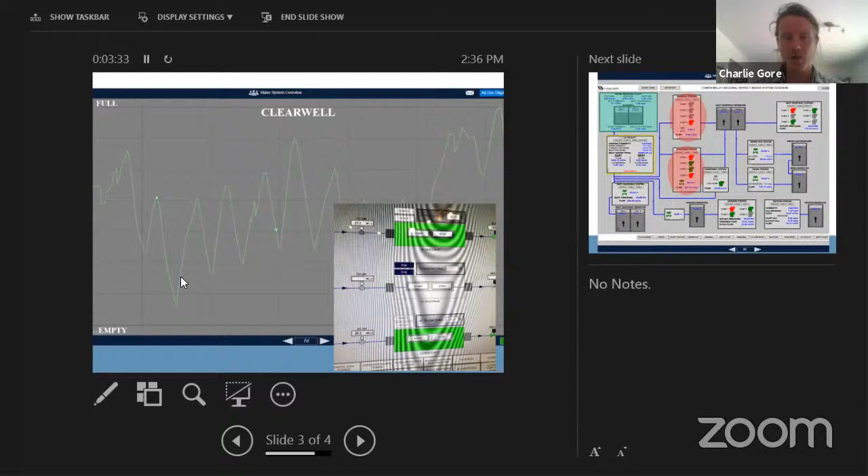So again, that was a very nervous week for us as we watched this new operation system in practice, but our contractor team, as well as our fantastic operators at CVRD, worked through all those bugs and were able to keep the system flowing flawlessly.

This is a little snapshot of our PI system, which gives a graphic representation of our system. You can see in the top left a new part of our facility showing the water treatment plant and the clear well, the large reservoir at the tail end of our treatment plant, feeding our new system and our existing system.

You can see the Dingwall station and Ryan Road station, pump stations in our existing system required during high usage to pump water up to the East Courtenay Reservoir. We showed over the last week that with the treatment plant online, we don't need any of these pumps anymore. This is another advantage of our new system, that we're able to start decommissioning some of the pumps required in the past to feed our residents.

We can start decommissioning those because we've located the reservoir at the water treatment plant at the right elevation, so we can feed the entire system through gravity and use a lot less electricity through the transmission system. That reduces our maintenance costs and has other ancillary advantages, giving our team more time to do maintenance on other parts of the system.

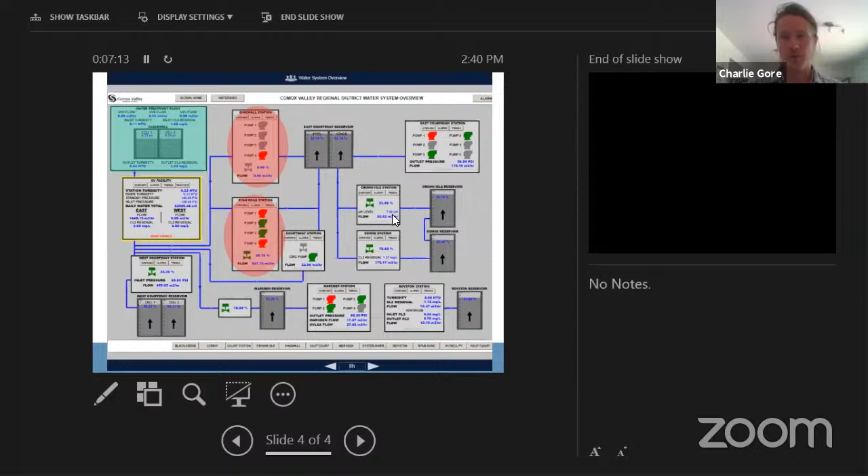That's great, thank you. Yeah, I haven't noticed a significant change in the temperature yet, but I'm looking forward to that. Okay, any other questions? Oh, I forgot to mention that Mayor Wells is alternate for Director Hillian today.

So go ahead, Director Wells, Mayor Wells. Oh, I have to. There you go. Thank you very much, Chair. Yeah, I'm very excited, very serendipitous that I'm here to hear the update today.

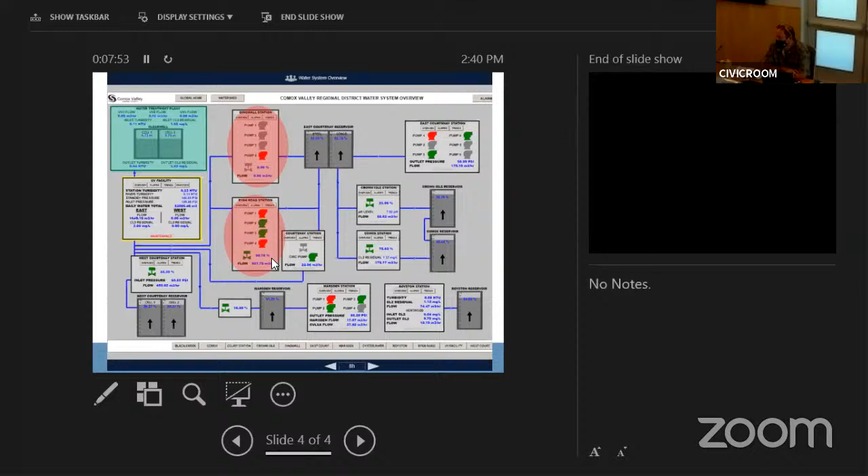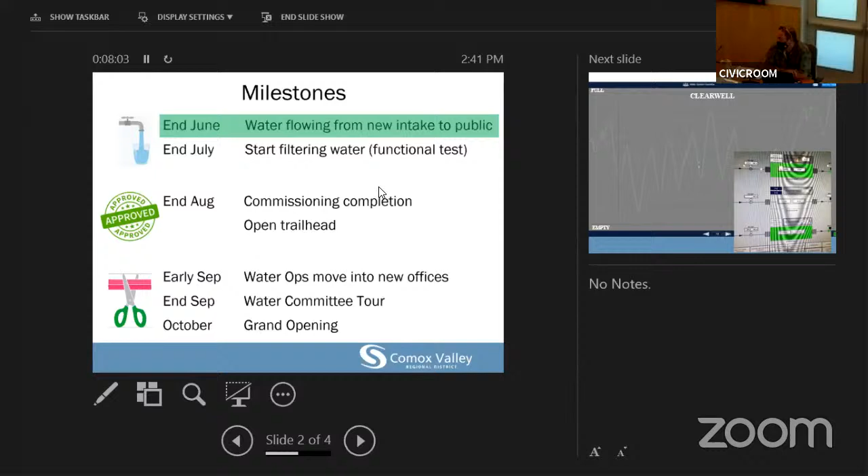Really the only question I have is I saw on the timeline that in September there's going to be a tour for the water committee members. I know of at least one person who's not on the committee anymore but would be interested in possibly attending, that being myself. I don't know if that's possible, but I'm just throwing that out there. Maybe the current chair could put a good word in for me.

Okay, I will do that. But thank you so much. It's great to see where this has come. It's taken a few years, but thanks again.

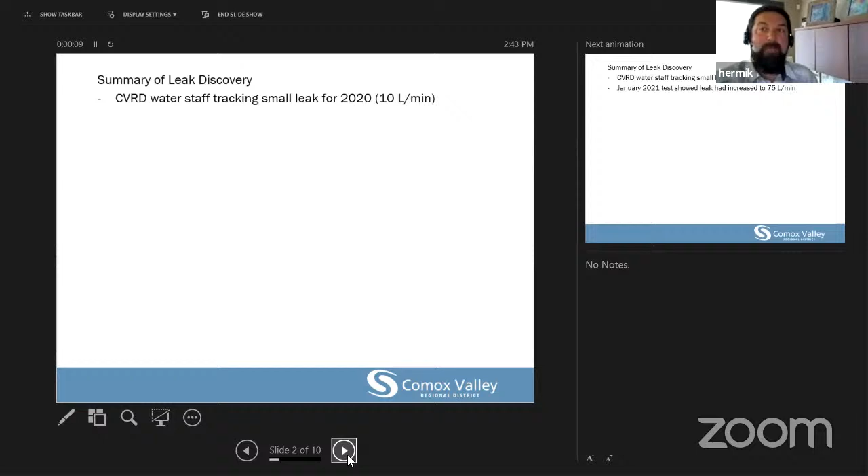So, the summary of the leak discovery. We've been tracking a leak for most of 2020. It was a relatively small leak, about 10 liters a minute. And we had seen a significant increase in our January test, up to about 75 liters a minute.

For context, the leak in 2019 that caused the big repair, going to stage 4, was about 700 liters a minute. So about 10 times the size of this one, but still significant, considering it's treated water going out into the river.

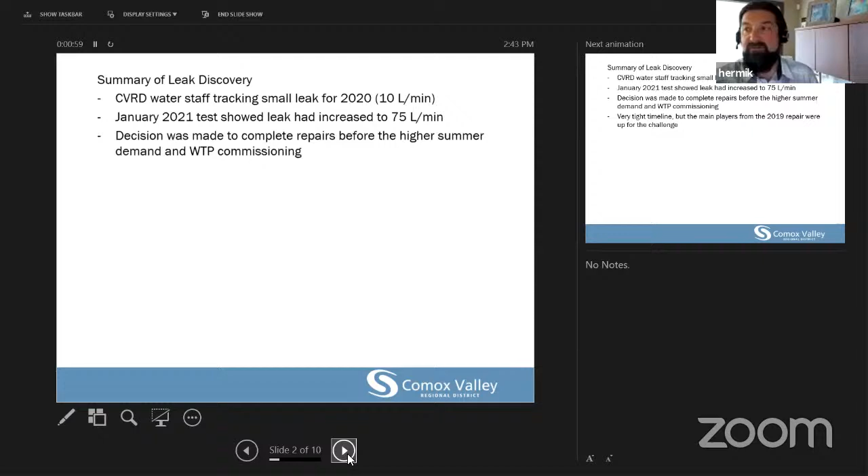So we made a decision to repair before the summer demand, as well as the water treatment plant commissioning. As Charlie mentioned, the pump stations that we're able to deactivate during the commissioning and running of the water treatment plant are due to the fact that we have a slightly higher pressure coming into the system. That enables us to get rid of those pumps, but it was important to try and fix these leaks before this happened.

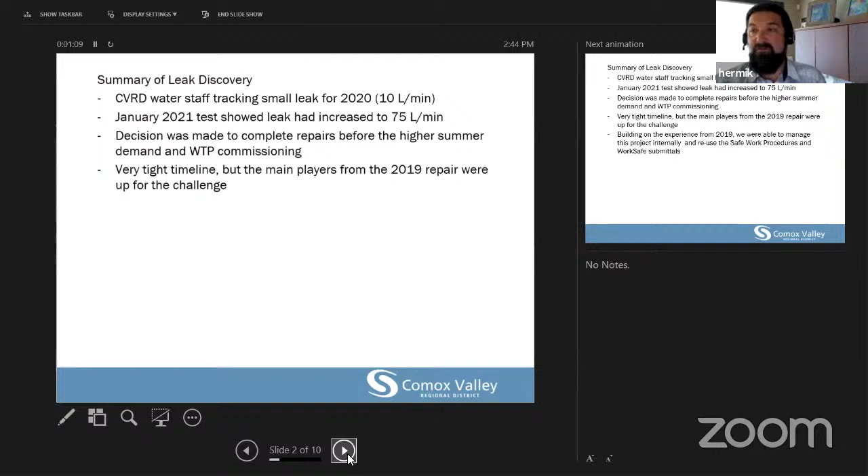It was a very tight timeline, but we were able to get a hold of most of the team members from the 2019 repair, and they were ready to go on our call. So we made the call to repair it. We were able to reuse a bunch of the safe work procedures and work safe submittals that took a lot of time in 2019. There was some new work safe personnel in place, so they came to site and we had a meeting, and they were very satisfied with our procedures and plans. So we were ready to move forward.

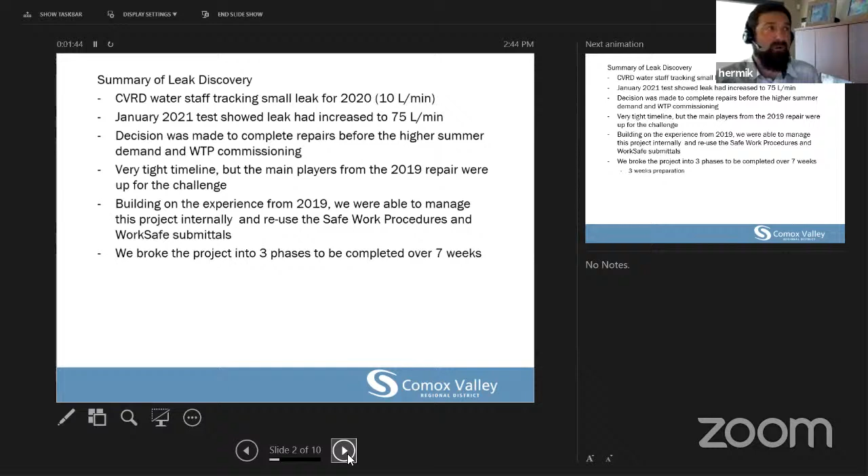We broke the Puntledge River crossing project into 3 phases. I figured we had about 7 weeks to do the repairs, 3 weeks in prep, and 4 weeks to execute.

One of the pieces of infrastructure that we didn't install in 2019 was the hatch for the divers to go in. We were contemplating putting it in then, but it just didn't make sense at the time due to the timing, and we realized that this was the best way for the divers to enter. The infrastructure that was installed in 2019 was very useful in assisting with our lockout procedures and getting that very important double block and bleed when you have divers entering the pipe.

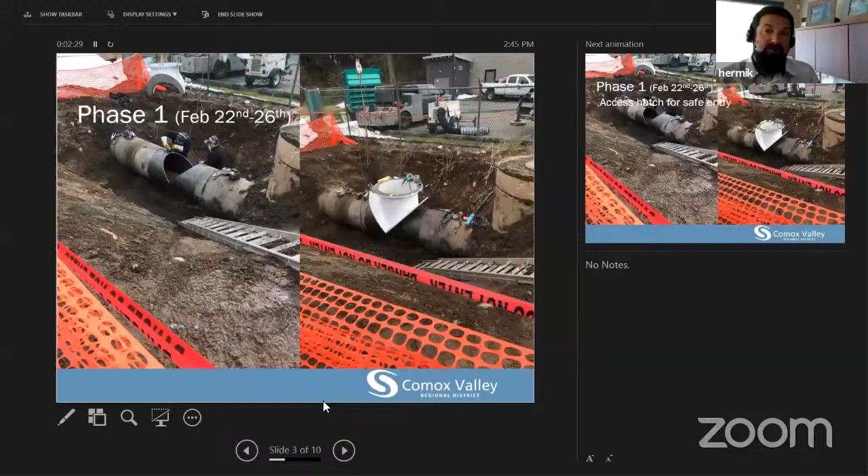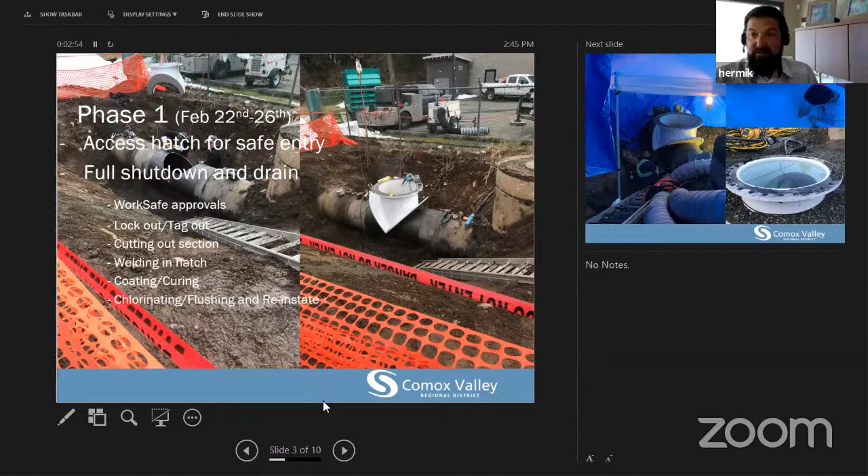So the week of the 22nd was when this hatch got installed. Basically, it involved a full shutdown and drain, full lockout tagout, cutting out a section of pipe and welding in a hatch. The coating and curing took a long time - it took the majority of the project on this first phase, just due to the fact that the materials had to be cured at a certain temperature, because this is potable water coating, so it's very important that it's cured properly.

Here's a photo of the hatch as it's being installed, and then of the hatch once it's been backfilled and ready to have the blind flange put back on.

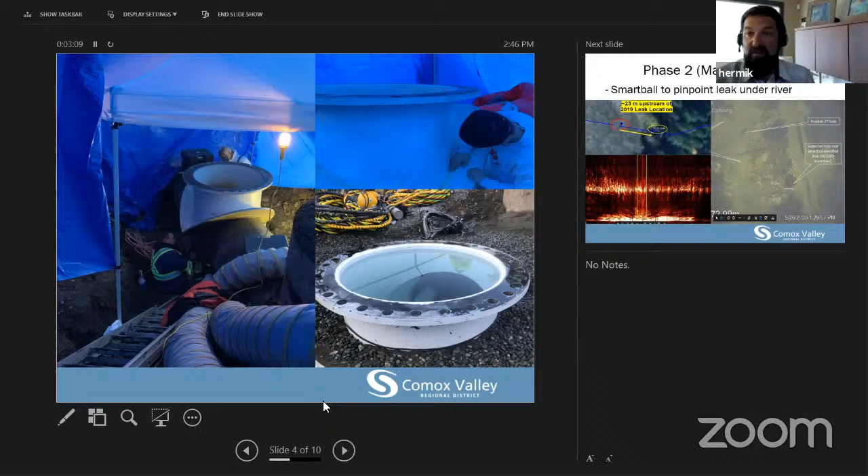Phase 2 was the week of March 1st to 5th. We had a week to basically shut the system down again and insert SmartBall, which is the acoustic device that helped us pinpoint the leak. You can see in the top left photo there, it was located about 23 meters upstream, more in the center of the river from where the last leak was, and you can see the acoustic signature of the leak below. On the right we'd sent in an ROV, a remote operated vehicle, and we took some photos so the divers could see what they were looking for before they head in the pipe. Otherwise it's like looking for a needle in a haystack when you go into the pipe looking for a little pinhole. So with the acoustic and the visuals, we were able to pinpoint the leak for the divers.

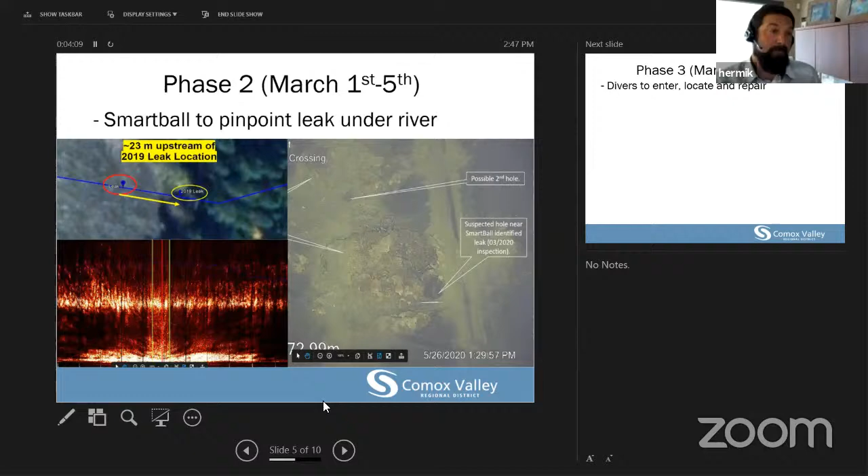As the divers went in the week of March 15th, here are some photos of the equipment - the equipment that monitors the diver's safety, their air supply, their tool air. They use air tools in there as well, and the CCTV, of course, so we can see what the diver's seeing.

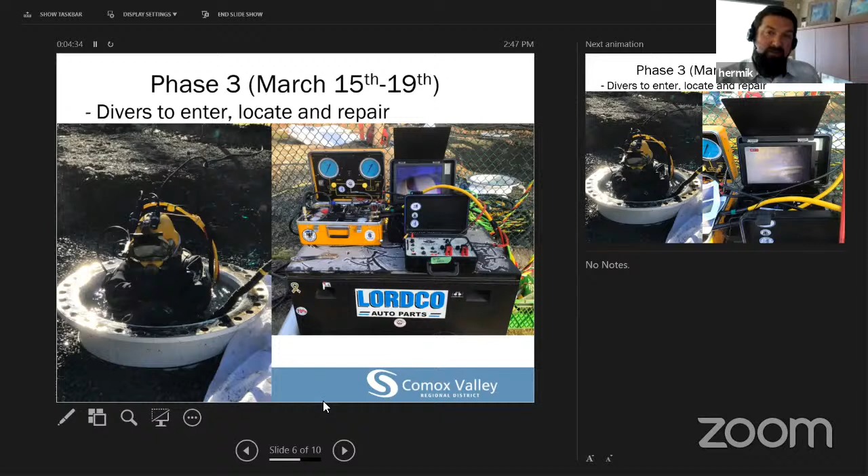The diver heading in - I think Christiane thought this looked like just a guy getting in a little kiddie pool. They were really happy with the hatch, actually said this was one of the best pipe entries they've had. So fingers crossed, but if we need this again, this part will be reusable, which will substantially bring down the cost of the next project.

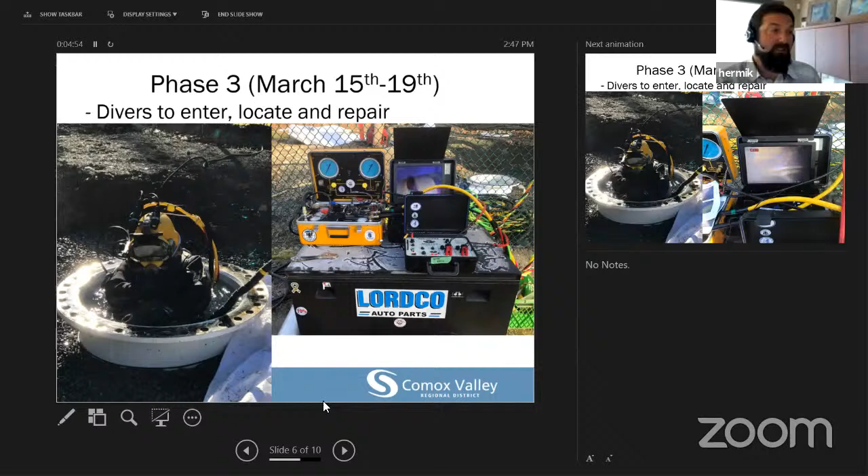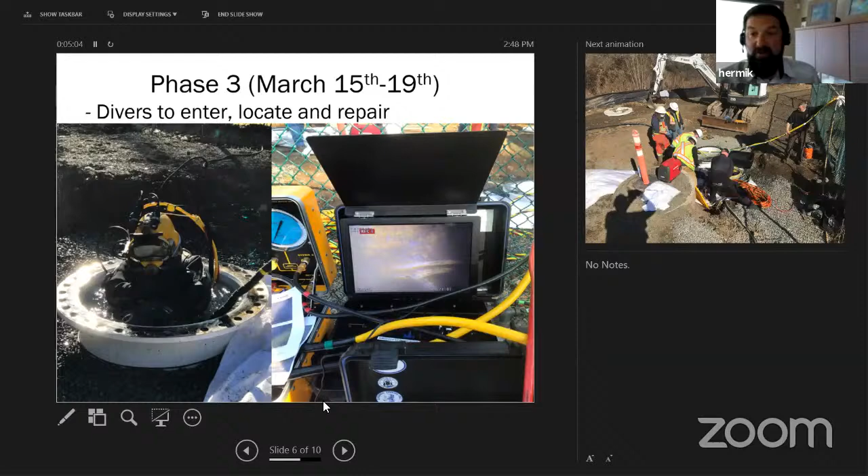And then there's a photo of just the screen that we're looking at with the diver. So as he's up in the pipe working and looking for leaks, we can be looking and seeing what he's seeing.

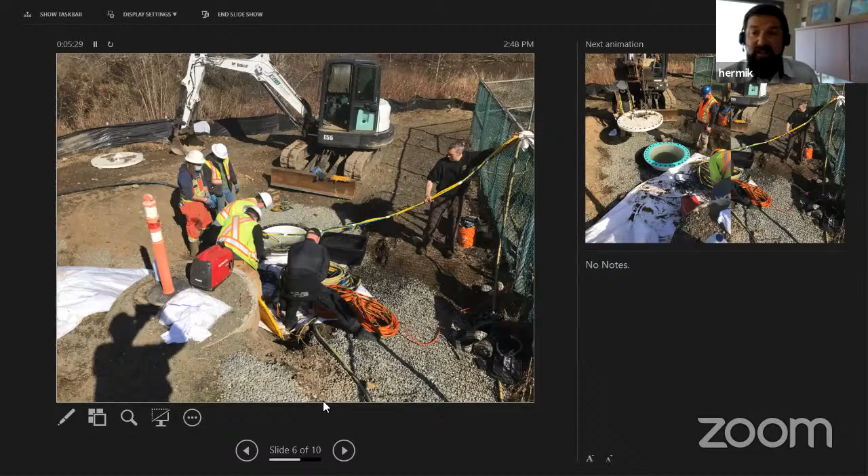This photo is just of the safety crew. There's a diver ready to go in if need be to assist. The cord that is going in is being chlorinated by the operators just before it goes in with sodium hypochlorite, as well as a CCTV line, air for the divers to breathe, air for the tools, and a retrieval rope if needed.

And putting the hatch back on, and the successful pressure test at the end of the day. This job was completed on time and within the week that we'd allowed, and it went really well, chlorinated and disinfected, and put back into service by the end of the week.

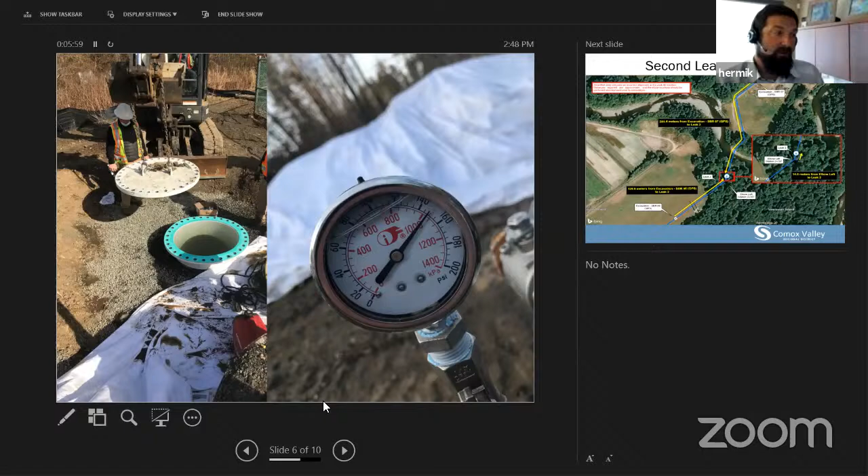So while SmartBall was going down the pipe, it identified a second leak. This leak was on the concrete cylinder pipe, the pre-stressed concrete cylinder pipe, more down near the Tsolum River crossing.

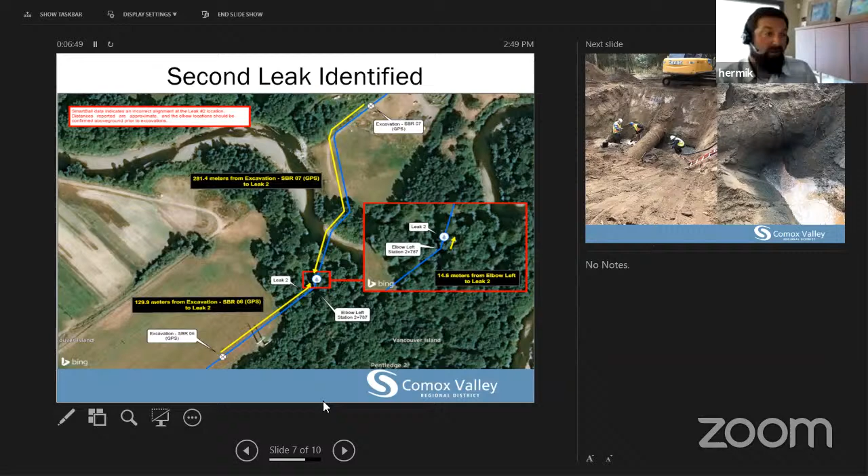We had to order parts and pieces, and we were coming at this one blind because it's a very unique pipe to work with. It's a pipe you don't have to work with very often, thankfully, but it does take some specialty repair pieces. So we compiled parts and pieces for a variety of repairs. We thought about the three kind of main repairs this could be - basically if it's a joint leak or a main barrel leak, or you're going to repair one or two sections. So we had parts and pieces compiled to repair all those, and we ended up digging up the pipe.

And thought we found water. We thought we found the leak right away. Turns out it was drainage coming down from the field that you saw in that previous photo. There's a field kind of uphill a bit. So it was not coming from the pipe at this location.

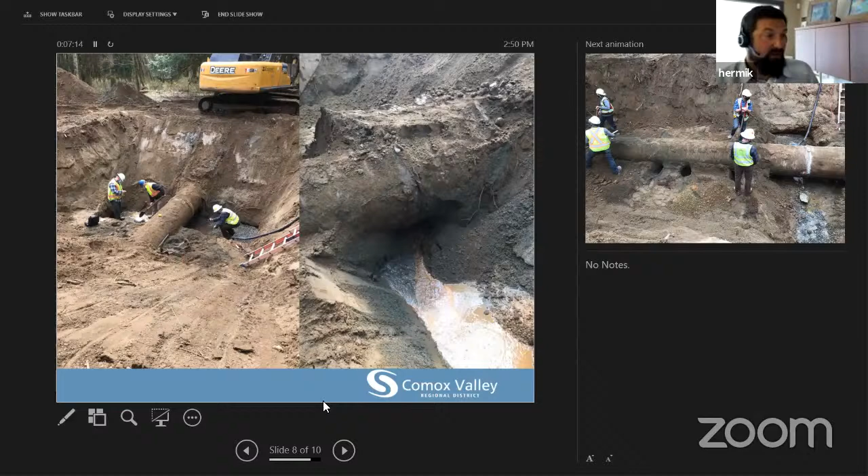So we exposed almost two sections of pipe. We dug up a few other reference points at the corner. You can see in this photo, we dug a bunch of test holes to look underneath. And at this point, we could not find a leak, couldn't determine it was there.

The company that owns the acoustic device - they were on the phone with their analysts, and they were trying to figure it out, and apparently it was right here, but we just couldn't see it. So it wasn't worth cutting into the pipe until we could see a leak.

So what we did was regrout that joint, set up a monitoring well - basically a piece of a gravel field with PVC pipe coming up to the surface that we can monitor for both water flow as well as residual, because a chlorine residual will be detectable in this if this is a leak. And got a really good condition assessment of the pipe, decided to backfill and move on.

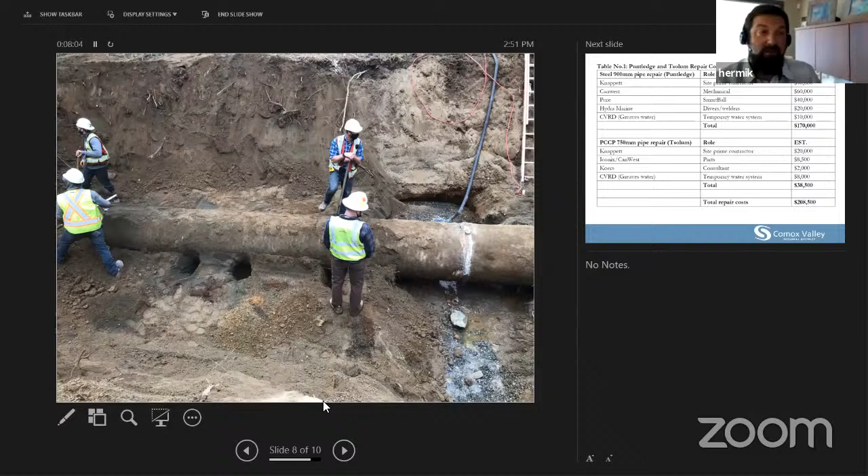So the costs associated with the repairs - you remember in early 2021, we came to the Water Committee to ask for a budget amendment up to $250,000 to do the Puntledge River repair. Due to the relatively low cost of the second inspection for the concrete cylinder pipe, we were able to keep both costs under the $250,000, avoiding a second amendment to the budget.

And you can see in the first one the $60,000 mark from the mechanical company that was largely to install that hatch and coat that hatch. So if and when we need to go in and look at this pipe again, that part of the project won't be necessary.

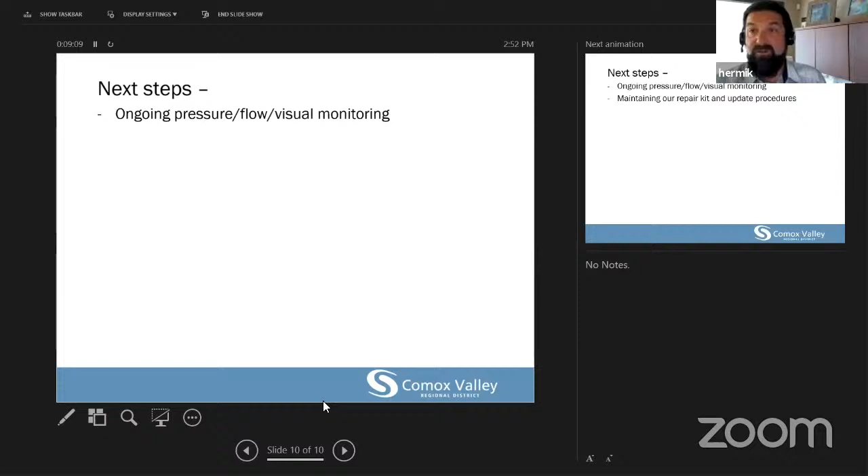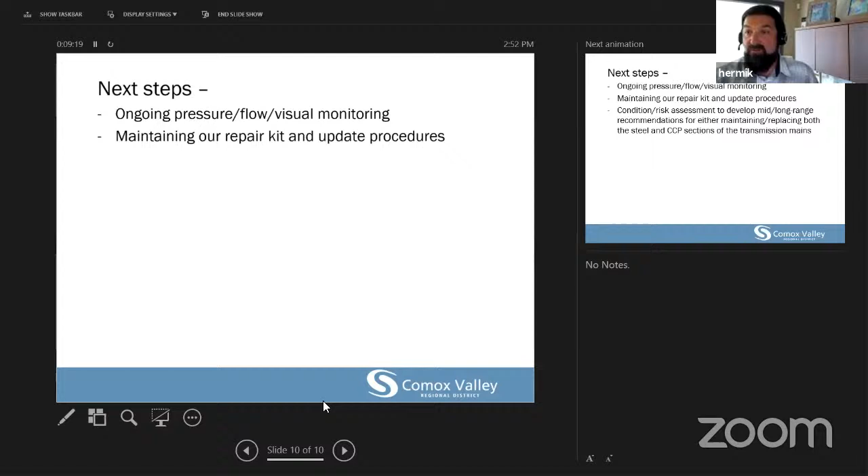So next steps - we plan ongoing pressure and flow monitoring through the ways we have been doing the river crossing, as well as the Hyprescon section with the monitoring well, as well as using our SCADA to look for flow. We're going to maintain our repair kit, but also update the procedures from what we learned through the process of digging up the Hyprescon pipe.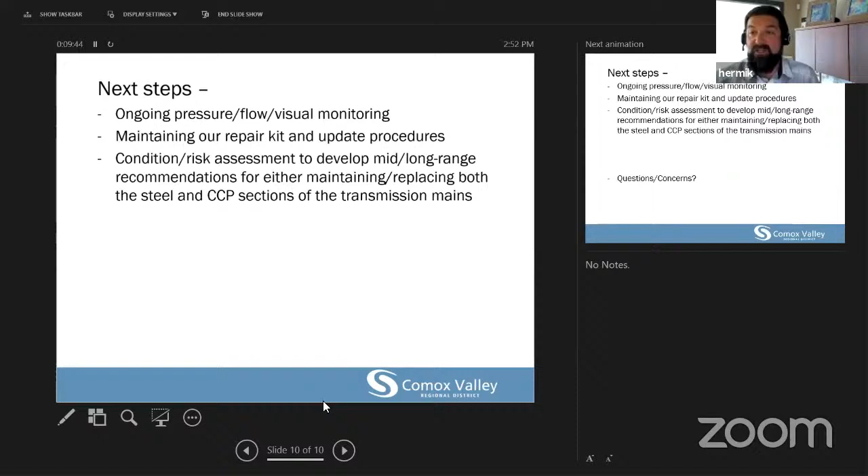And we're undertaking a condition assessment, and this is to develop a plan moving forward, recommendations for either maintaining or replacing both sections of pipe. So we're looking at the Hyprescon pipe that runs the length of the fields between the two rivers primarily, as well as the steel pipe that goes underneath the Puntledge River.

And if there's any questions or concerns, I'd be glad to try and answer them.

Great, thank you very much, Mike. Any questions or discussion? Okay, we have Director Grieve.

Thanks, Madam Chair. Through the CAO to Mike, I noticed you're pressure testing it at 150 PSI. What is the actual operational pressure in that pipe when it's just idling on a regular day? That is the operational pressure of the pipe, we're pressure testing it with the water in the pipe. Yeah, it's quite a high pressure pipe, but we need that pressure to get it through our distribution system, as well as to get it up the hill to the reservoirs at the top of East Courtenay.

And just one more, if I could. Given how very integral it is to the entire system, at what point would it be advantageous to replace the whole thing rather than just patching it up? What is the lifespan estimated for a pipe of that sort? That's a good question, and that's one thing we're hoping this condition assessment will tell us. It'll tell us if it makes sense to keep doing the repairs, or to replace the section, or both of the sections. Pipe has different lifespans depending on whether it's steel pipe, PVC, or Hyprescon pipe. Usually Hyprescon pipe you'd think would be good for approximately 60 years. Steel and PVC could be up to 80 years for these transmission mains. And this pipe was installed in 1982.

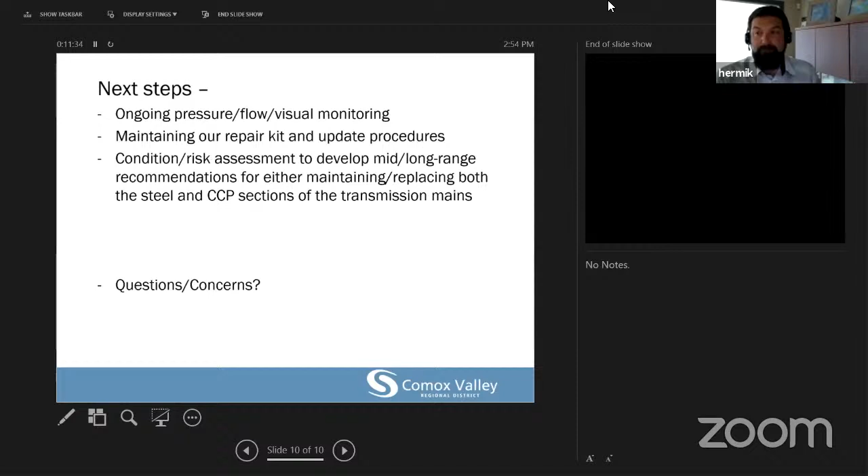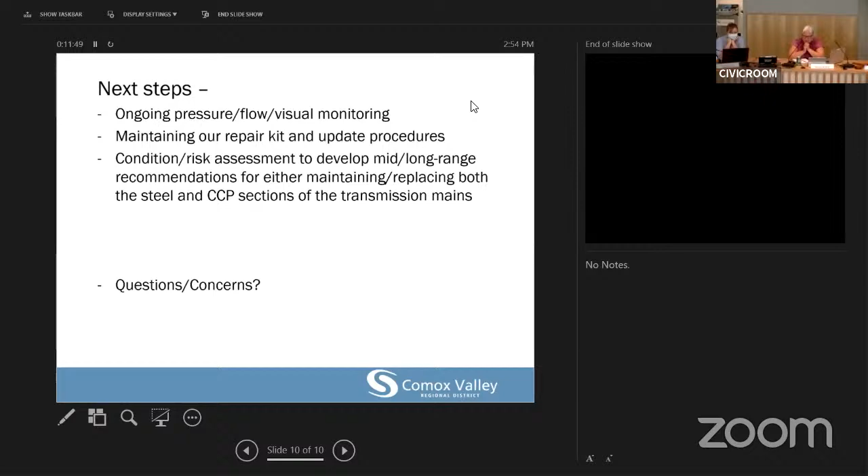Would you mind going back to the slide with the budget amounts? I was curious about the smart ball device, I know you had a price there for that somewhere. There it is, smart ball, 40,000. So what does that go towards with the smart ball, and is that something that is also, you know, for future use, or is that an ongoing cost every time? Yeah, this would be a cost moving forward that we would budget for in this type of repair. It's to go into that pipe blind.

Now, the track record has been very good with smart ball. Obviously the Hyprescon part of it was a disappointment, we couldn't find it, although they do feel that was a leak that was recorded at the time. But underneath, in the steel section of pipe, it's been really good - I don't know how we would have found those leaks without it. That $40,000, a large part of that is the mobbing and demobbing of the crew to run the acoustic device. The ball itself is just about the size of a softball and it rolls down the pipe, but it's all the tracking modules that need to be installed in order to track it to its location, as well as the sound. Really what takes the most time in the smart ball analysis is the analysis afterwards - they take it back and there's a team of analysts looking for anomaly sounds, and what is a leak and what isn't. So it is quite a process, but if we'd had the diver in there, we had him right at the spot, 23 meters upstream of the last repair. He was looking around, and it took about 20 minutes for him and us to find that hole. If we'd gone in blind, we'd never find it. So that is a cost that we'll be incurring every time we do this.

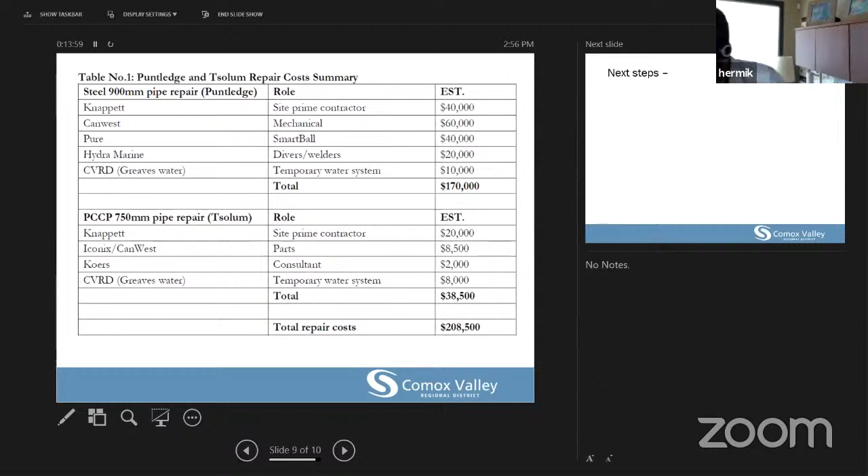I was thinking that some of that would definitely be the analysis part, but I wondered if there were maintenance costs, or to the actual technology as well that comes into play.

Thank you. Oh, we have Director Hamir. Thank you, Chair. Go ahead. Sorry, your comment just tweaked an idea for me. I'm wondering, this smart ball technology we were just talking about - is that something the RD should be purchasing rather than paying for on an annual basis? What is one of those costs? We have no idea, this would be a proprietary thing that they've developed, and a lot of the money has gone into the R&D of it, and it's also the analysts. I personally think it's a good idea to buy tools that can help us do leak detection, but I think this is a tool where, with the level of analysis needed, you have to have specialists doing it, and then it just becomes cost prohibitive to have it yourself.